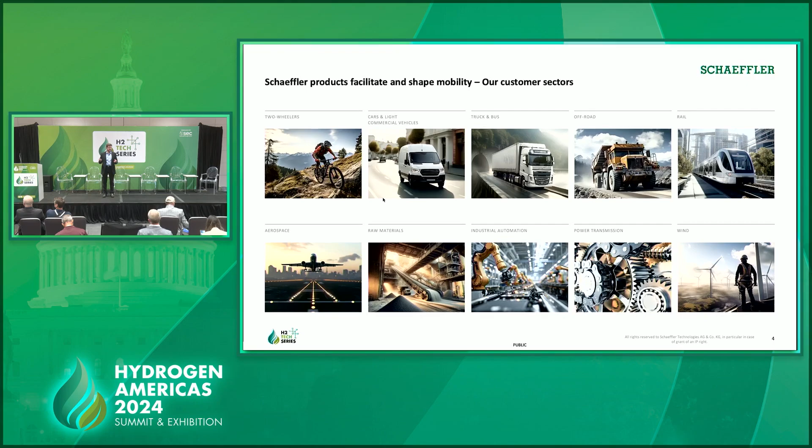And we serve almost everything that moves. So you can see our 10 sectors that we serve here. Literally everything from bicycles all the way through airplanes, wind turbines, everything in between. So anything that moves, we're there. And if you have heard of Schaeffler before, you probably know us as a bearing company. So we make every type of rolling element bearing you can imagine.

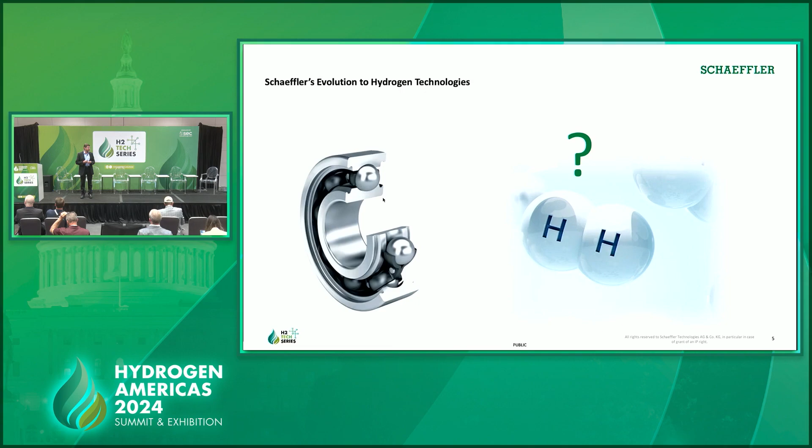So you may be wondering, how does a bearing company decide to get into the hydrogen space? So that's what I'll show you a little bit about here today.

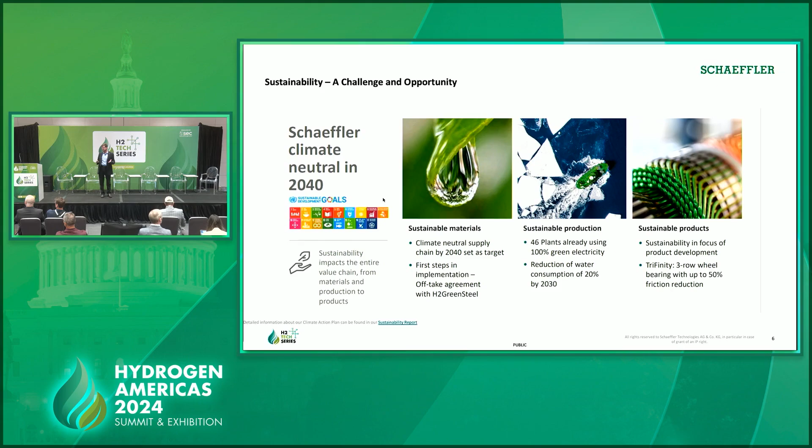So it started with our commitment to sustainability. Some years ago, we made a very serious commitment to sustainability to get to net zero by 2040. So a very aggressive target there. We have 46 of our plants already on purely green electricity. And we focus a lot of our product portfolio on green products, such as electric motors for electric axles for electric cars, just for example. So we were actually selected as one of the UN's top 50 sustainability examples. So that is a commitment we take very seriously.

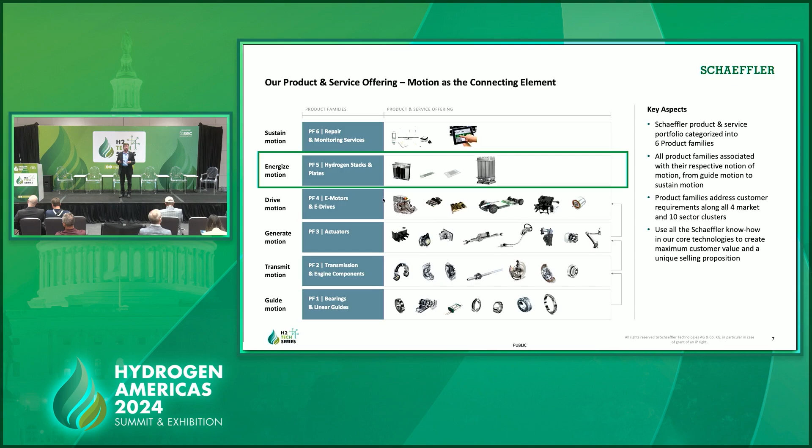And then we came to energized motion, which is all about storing and transferring energy. And so we looked at our core competencies and tried to think, how could we contribute to this new hydrogen economy, because it's going to be so key to our future. Actually, one of the big influences on Schaeffler is our biggest part of our carbon footprint by far is the steel that we purchase. And the only known way right now to make green steel is with hydrogen. So we're going to need a lot of hydrogen.

So it was important to us. So we looked to our core competencies that we had developed by producing all of these products over the years, 75 years actually. And we have a great expertise in cold forming, sheet metal forming and stamping. We're also quite good at specialty coatings. Actually, about a third of our products have some kind of coating applied to them, pretty highly engineered coatings. And we do injection molding, and also we've built up a good understanding of complex engineered systems.

And so if you put those competencies together, it occurred to us that we could be a pretty decent supplier of bipolar plates. And as you know, in a fuel cell or an electrolyzer stack, there are hundreds of bipolar plates. So these are going to have to be produced in automotive volumes, and we are an automotive volume producer. So we thought that would be a good fit.

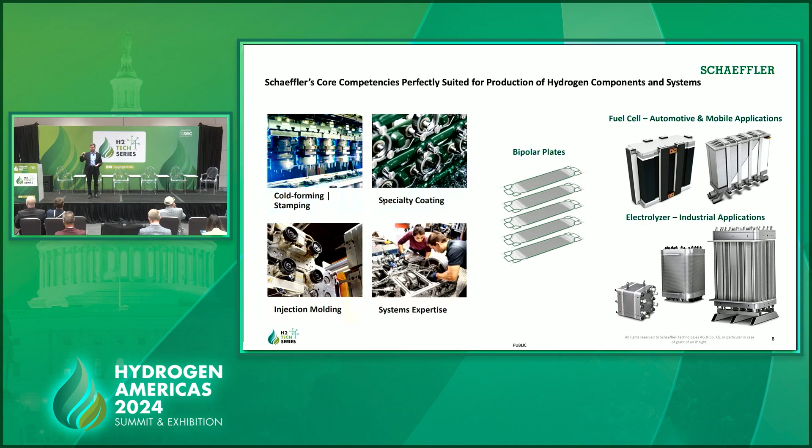So we are actually in the bipolar plate business. I'll talk about our joint venture in a minute, but production will be starting this month actually in France. And we're applying that expertise both to fuel cells on the automotive side. So we actually have a department in our automotive division that's responsible for the fuel cells, and then also in electrolyzers in the industrial part of our business. So you can see several of our electrolyzers there up to our 1 megawatt stack, which we have on test right now.

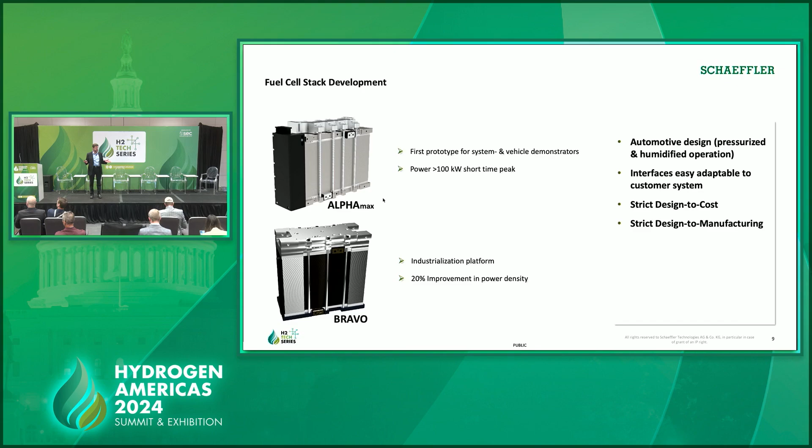So I'll start with some of the fuel cells. You can see our first two generations of fuel cells here, the Alpha and the Bravo. So when we went to the Bravo stack, which we're just now finishing the testing on, we achieved a 20% improvement in power density. And of course, this is all designed to automotive standards. And most importantly, what we think Schaeffler could bring to the table is cost control through our manufacturing expertise. So all of this is designed with the manufacturing processes in mind from the very beginning. So we're pretty happy with the performance of the Bravo stack.

Now, of course, if you look at a fuel cell vehicle, there's a lot more going on than just the stack of bipolar plates there. There are all kinds of air path, hydrogen path, coolant loops. And it turns out that in some of our automotive products, we have a good fit for many of those things. So on the right side, you can see some of the products we can offer, like airfoil bearings. So if you have a compressor moving hydrogen, you can't have any oil in the bearings.

So we make a totally dry bearing. Actually, the shaft runs on a film of air. So those are useful for the compressors.

We make a hydrogen ejector unit for recirculation of hydrogen. That's based on some of our engine valve train technology. And then as well, we make thermal management modules for everything from conventional vehicles to hybrid to electric vehicles. And you also need to move coolant around in a fuel cell vehicle, so we offer those as well. And then, of course, the foundation product being the bipolar plate.

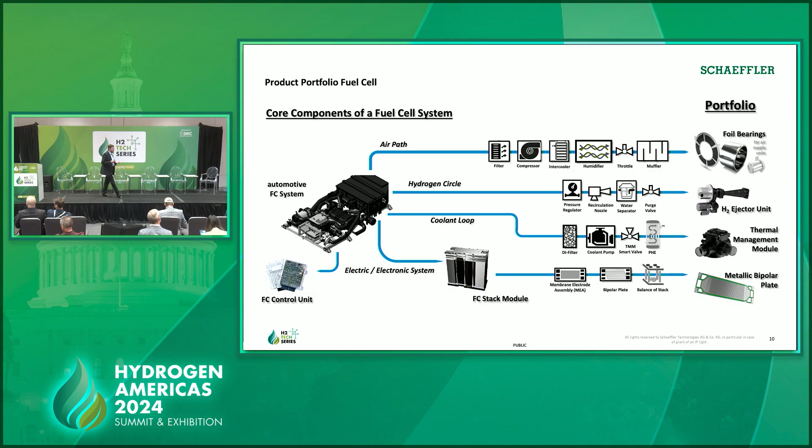We've assembled the bulk of these components into a demo vehicle, which if you're in Germany and have an interest, we can organize a test drive for you.

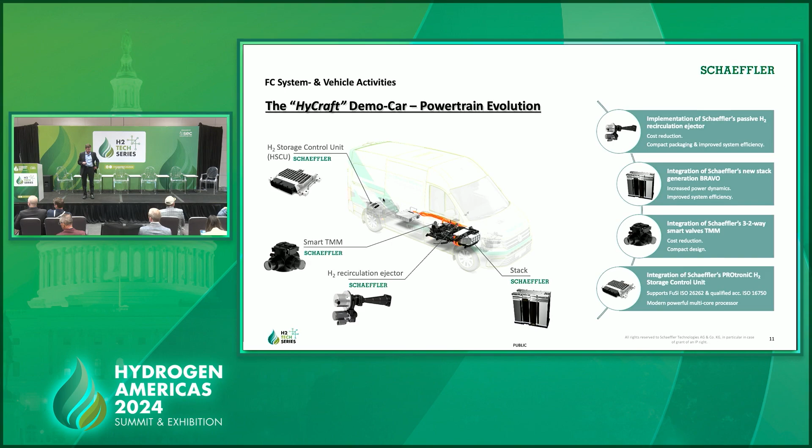So you can see we're upgrading now to our Bravo stack. We have our hydrogen recirculator, thermal management. As well, we offer through one of our divisions control units. So we have a control for the hydrogen storage in there with our own control unit. So the technology is really rolling on the road here.

And finally, on the fuel cell side, we come to our joint venture we call InnoPlate. It's a joint venture between Schaeffler and Symbio, and it will produce the bipolar plate subassemblies, which then either Symbio or other customers can build up into a complete fuel cell stack, fuel cell system. It's a 50-50 joint venture.

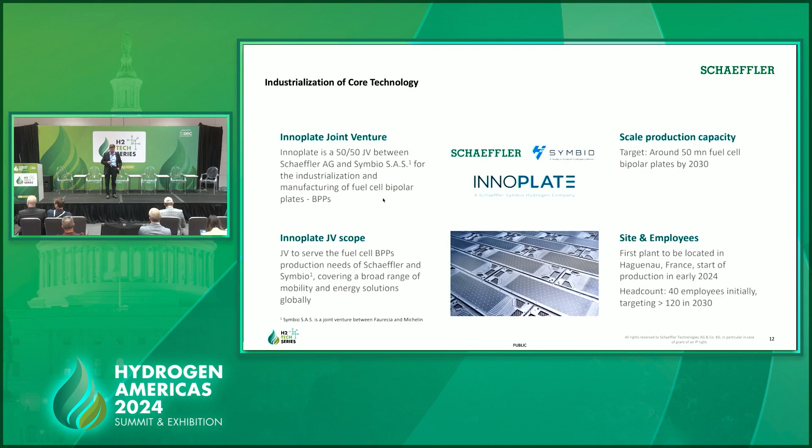As I mentioned, bipolar plate production for both Symbio as well as others. Hope to get to 50 million plate capacity by 2030. You need a lot of these, and every single one has to be perfect, and that's what we're good at, so that's why we're in the business. It's in Haguenau, France, and the production is starting up this month, so we're getting rolling there.

And then if we turn to our electrolyzer portfolio, we started in the electrolyzer side with an acquisition of a company called Hydron. You can see some of their products there. And the biggest one, the 1 megawatt stack, is our serious offering for significant applications for hydrogen generation.

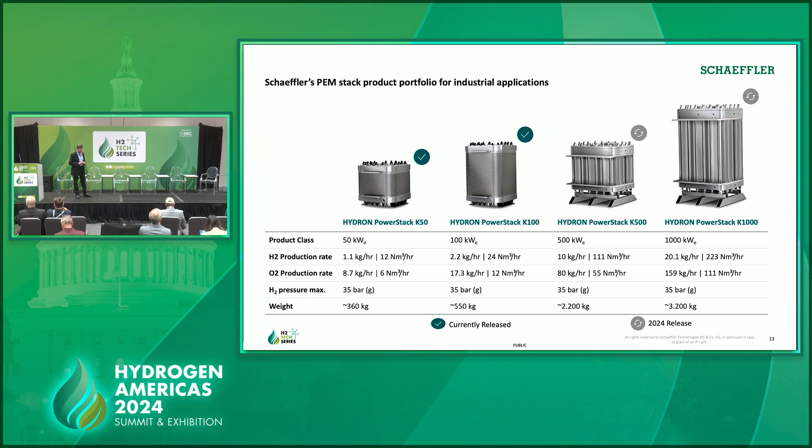So that's on test both at labs in the US and in Europe right now. And we have a limited production capacity available for the 1 megawatt stack already.

So what do we bring unique on the electrolyzer side? Well, the company Hydron had some unique technology, especially an integrated cooling loop, which results in better thermal management, better distribution of the heat throughout the electrolyzer, and also less risk of contamination with that cooling loop. It's designed for easy integration, so all the connection features are right on top there. We can, of course, constantly upgrade it as we get better and better at making bipolar plates.

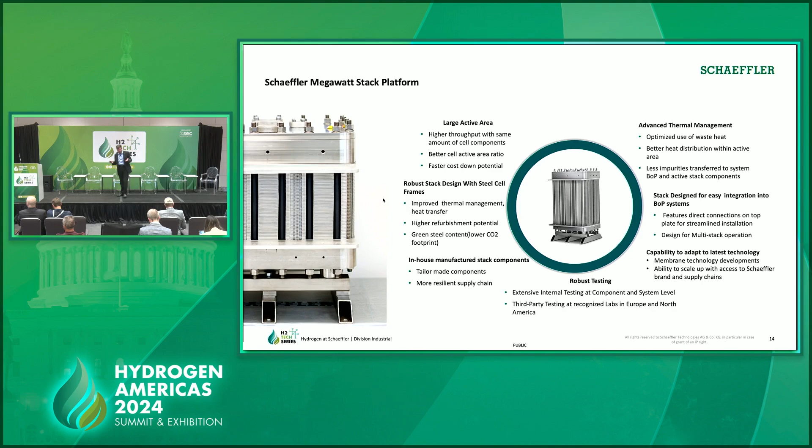I mentioned we're undergoing significant testing at a couple of certified labs. And of course, we're going to do an in-house vertically integrated supply chain based on our automotive expertise there. And then we have overall a large active area, which results in good production of hydrogen there. So we've also got a demonstrator going of this technology.

So at our plant in Schweinfurt, we've decided to fire one of our heat treat furnaces on hydrogen instead of natural gas. So you can see there we have a containerized solution with our 1 megawatt stack. So we'll produce 450 kilograms a day of hydrogen and use that in our furnace.

And that by itself, just that one furnace, saves 500 tons of CO2 per year. So pretty impressive just for a first demonstrator project, if you will. So we're pretty happy to see that technology working as well.

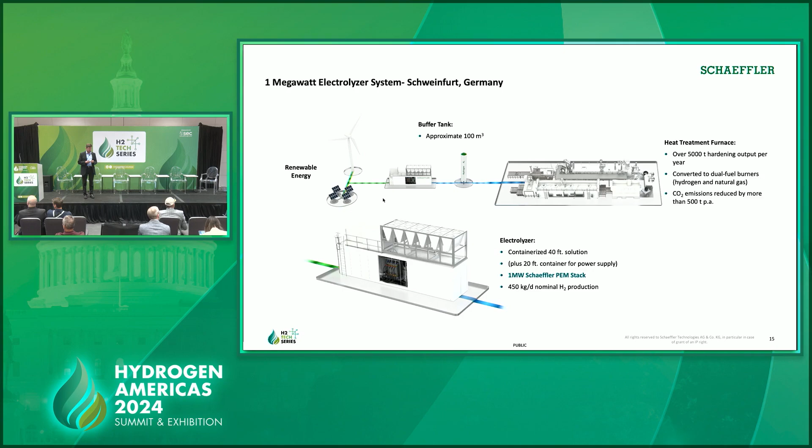So why do we think we're the right partner? Just to sum up the reasons I mentioned, we have mass production expertise, but also precision is probably the main reason. But we also have a global production footprint, and these things are heavy.

So they're very thin plates. You can see in our booth right over there. So you would think it's not very heavy, but essentially you're making a block of steel about this big by stacking up hundreds of these plates. So when you go to ship that, you'd like it to be close to where you're going to deliver it to. Otherwise, you're burning CO2 to get it where you need it to go.

I mentioned the metal forming and processing. We've built up quite expertise in, for example, flow field design. So we make torque converters, which live and die from fluid flow. And so we were able to apply that expertise to optimize the flow field.

I mentioned the surface technology. And then we are in renewables for a long time and for the long haul. So we're the number one worldwide supplier of bearings for wind turbines. So we know the renewable market quite well.

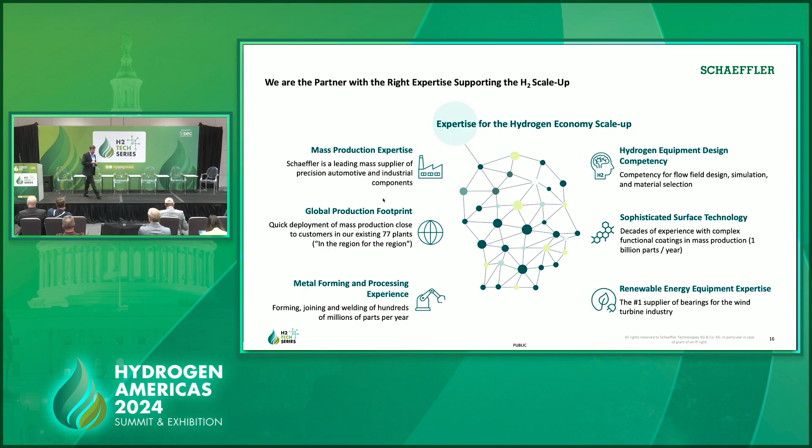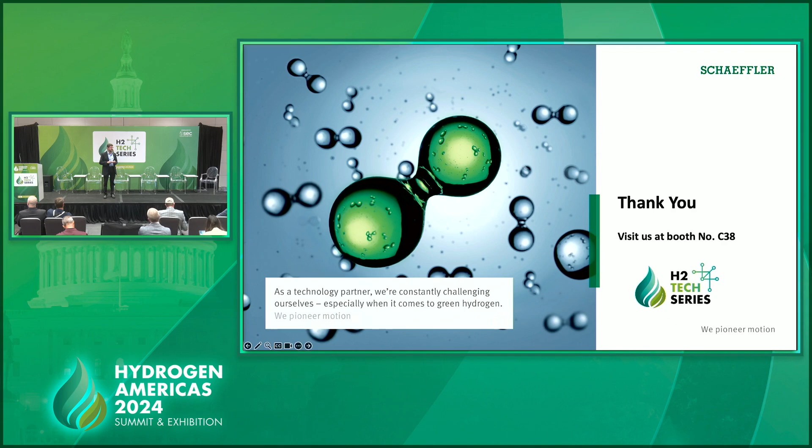So with that, we are looking for partners, both on the fuel cell side as bipolar plate customers, or on the electrolyzer side as someone to integrate a complete system with us. I mentioned our booth is over there at C38, so we have both a fuel cell and an electrolyzer bipolar plate on display, as well as some of the other components. So feel free to stop by and say hello, and we'll be happy to talk further.